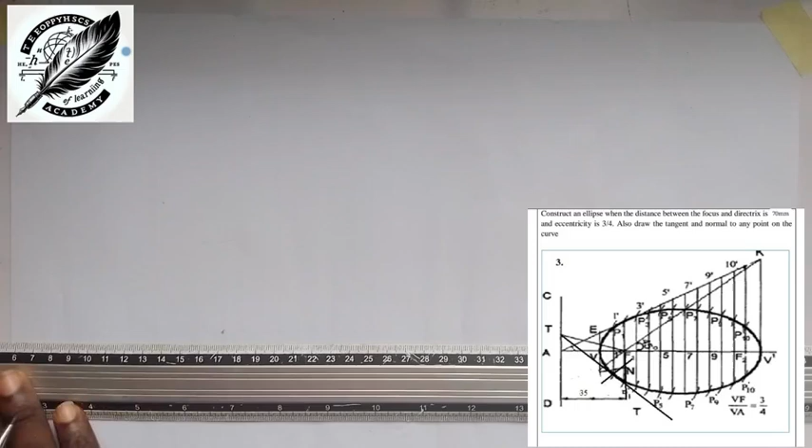I want to talk about how to draw an ellipse given a directrix and the eccentricity.

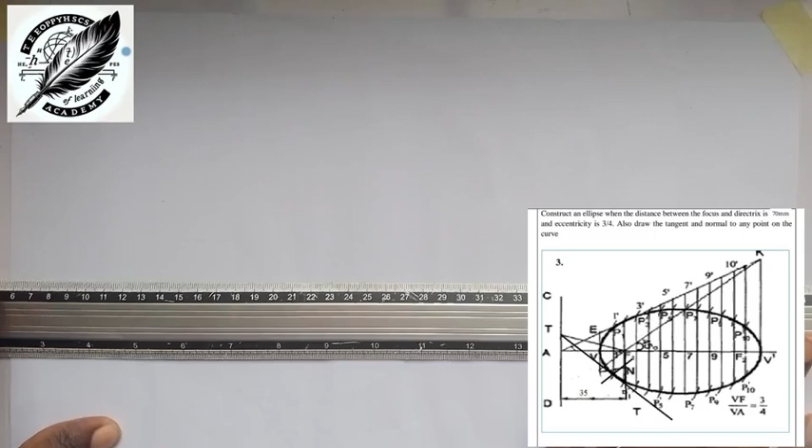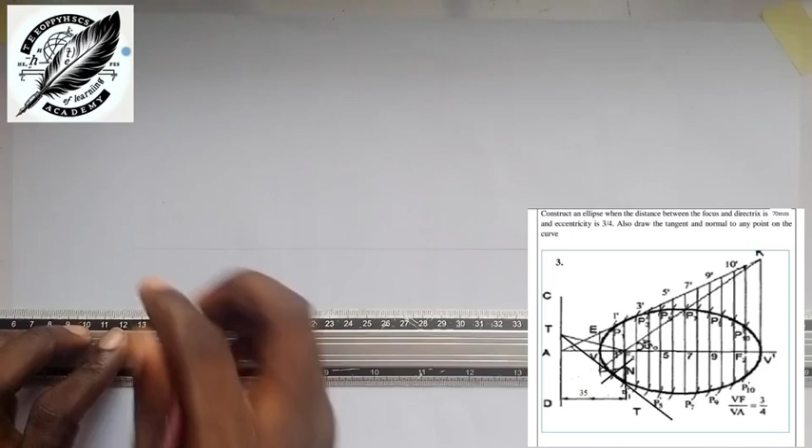So the first thing you need to do is take your ruler, your T-square here, and draw an axis line. So you draw an axis line horizontally here. You label this point here point C, and this here you label C prime. Then you place your set square on your T-square here and draw a vertical line.

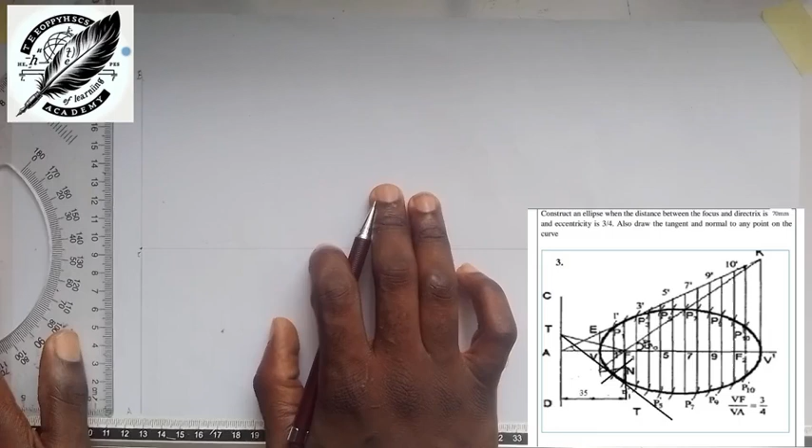So this line is called the directrix line. So you label this as A and this one B. Oh, sorry. Now you can see from the given question that the directrix is 70 mm, and the eccentricity is 3/4. Because my directrix is 70 mm, I can give it as 7 centimeters.

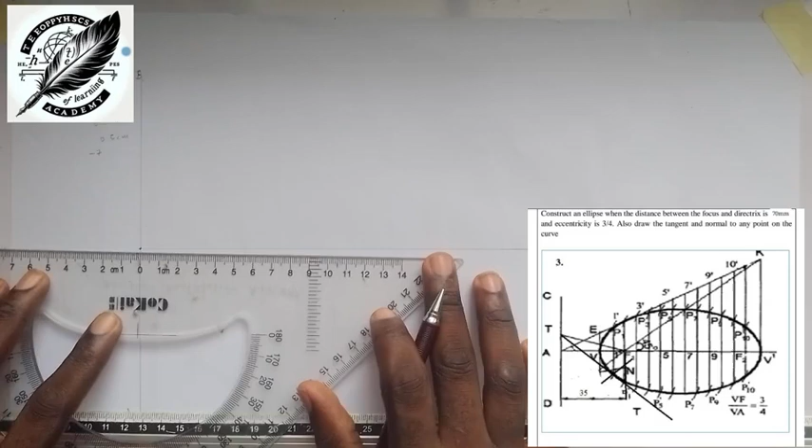Because 7 centimeters is too big, since I'm using A3, I'll divide it by 2, so I'll get 3.5 centimeters. So I'll be using 0.5 centimeter to divide it into 7 parts. Do you get me? So first I will take my ruler here and measure 3.5. So this is 3.5 here. Can you see it? So I'll mark and divide it into 7 parts: 1, 2, 3, 4, 5, 6, 7. Can you see it here?

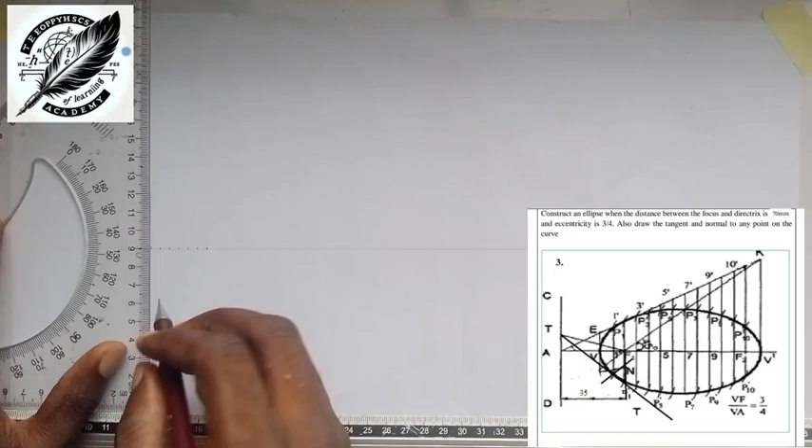So after that I will draw a line, a construction line, to divide it. Can you see? So this point that I measured from here to here is 7, because I used 3.5. I will call it the focal point.

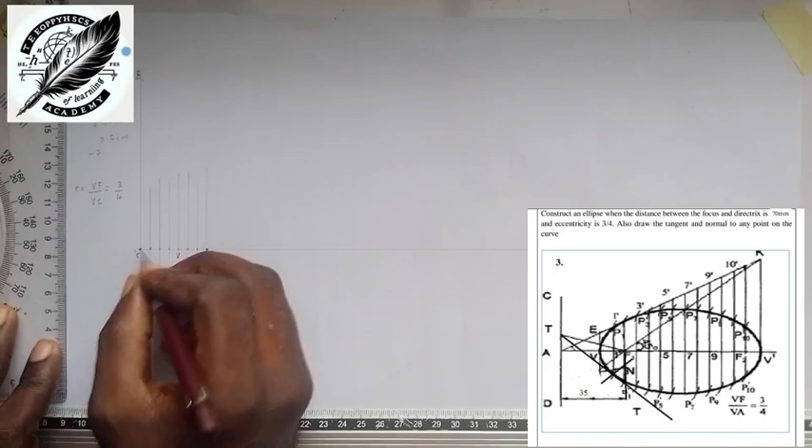Why? You can see that E is equal to VF over VC, which is 3/4. So from V to F is 3, so I need to count 3 lines. I can start counting: 0, 1, 2, 3. So this is V. From V to C is 4. I'll start counting: 0, 1, 2, 3, 4. That is 4. So when I'm done here, I will come to this point.

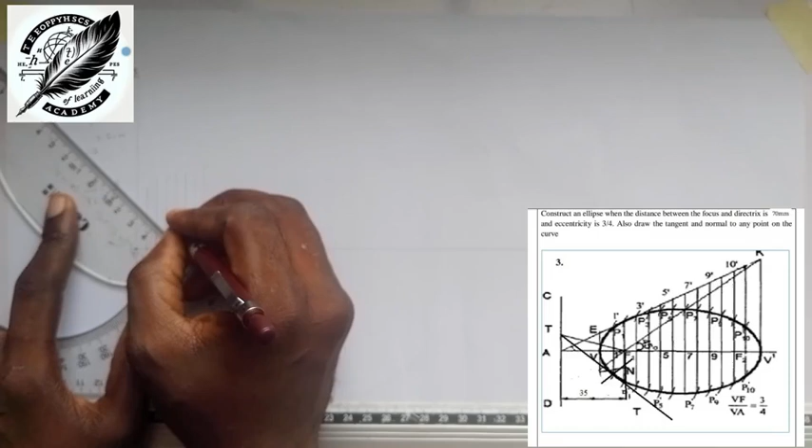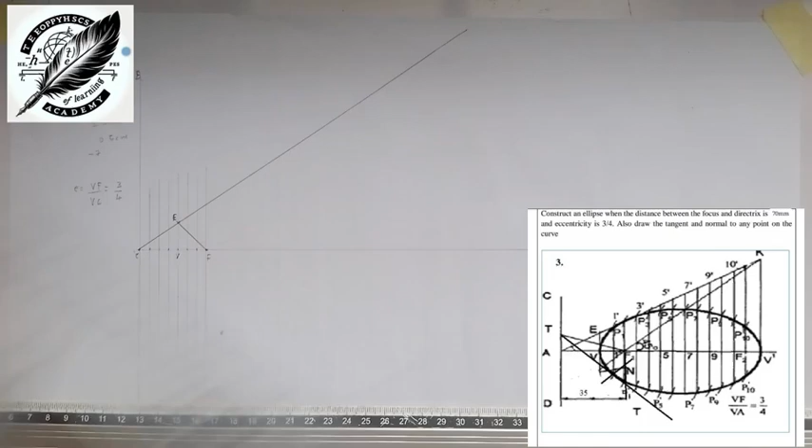I will take the 45-degree set square and connect from F up to V. So I will mark this point here and call it point E. When I'm done, I will take my ruler and connect point E and point C together. Can you see it? Are you seeing?

Now the next thing, I want to know the end. So for me to know the end, I will take my 45-degree set square here and connect where F meets the line from E. So I will connect this one here. Can you see it? So this place will be E prime. So I will drop this one down here, which I will call V prime. Can you see it?

Now I want to get my midpoint. So for me to get my midpoint, I need to start from V, the original V, and V prime, and take my measurement from that point. So this is my V prime, and from this place to this place is 9.5. So when I've got 9.5, what will I do? 9.5 divided by 2, which is 4.75.

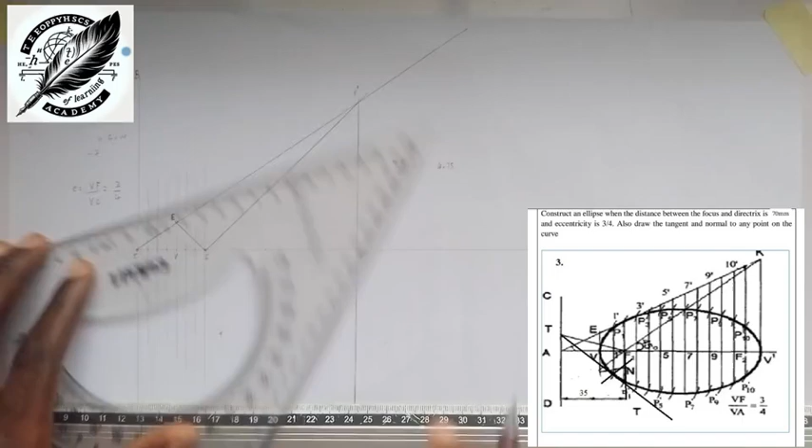So I will come to this place. This is my 0, this is my 4, and this is 4.7, so it will be 4.75 here. So come to this place here and draw a line like this. This is the midpoint. So this one I will call O. Do you get me?

So when I'm done with that, the next part for me to do is to divide this line. Let me just divide the line: 1, 2, 3, 4. I will divide the line into 10 parts. I'll use 1 centimeter for dividing the line. So I will count it and put my point here. So I will count this one.

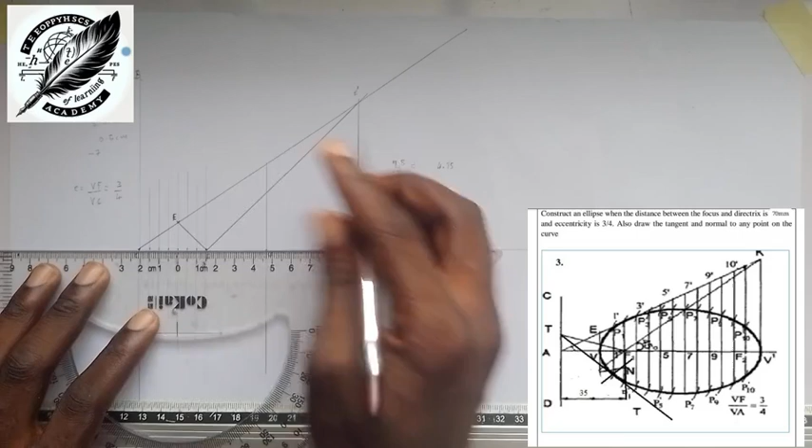Can you see it? So I can start counting. This is 1. I'll call this one 2. Call this one 3. Call this one 4. I'll call this 5, 6, 7, 8, 9. But it doesn't matter.

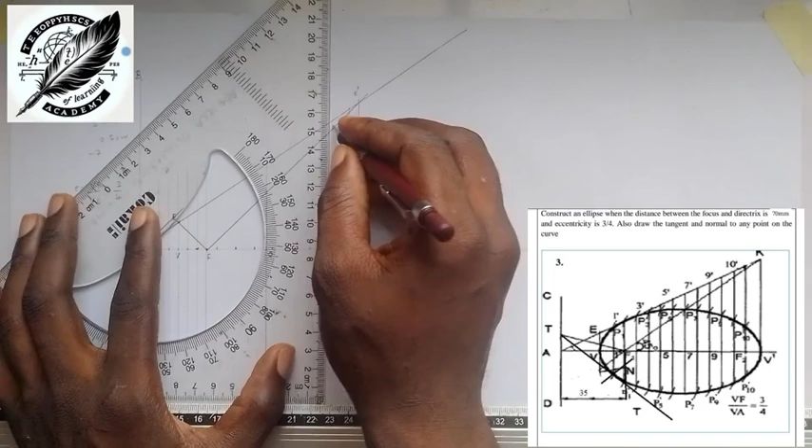Let's just mark this. So I'll just divide this line. Bring this one. Bring it down. Bring this one. Bring it down. Continue like that. Can you see it?

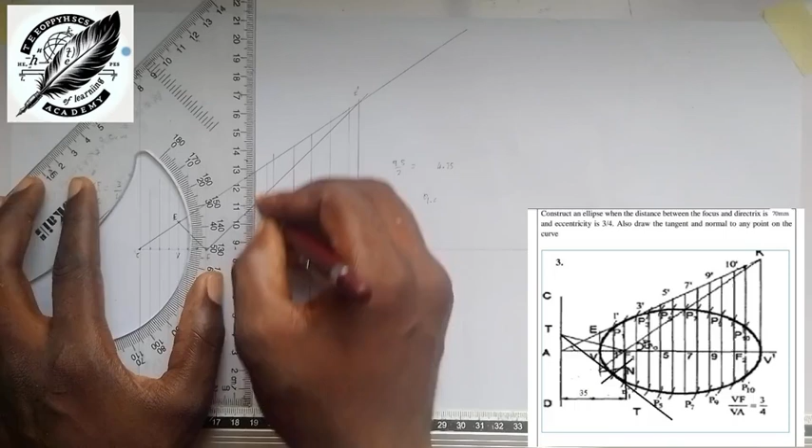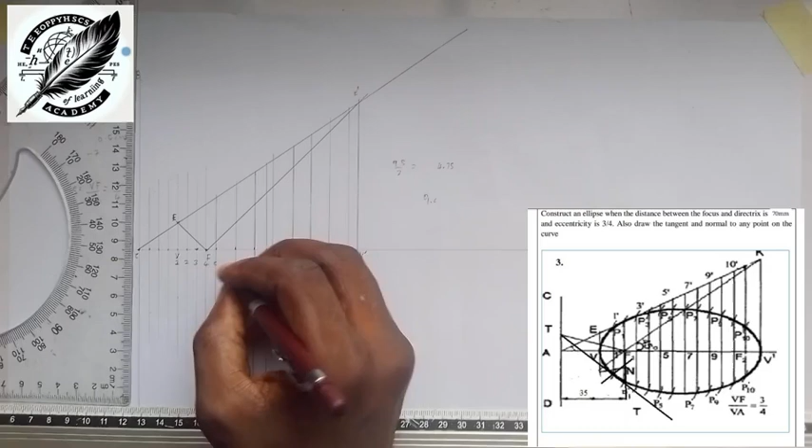So running it, if I can label, let me just label this. I will count this place. I will label this one 1. I will label this one 2, 3, 4, 5, 6, 7, 8, 9, 10, 11, 12, 13.

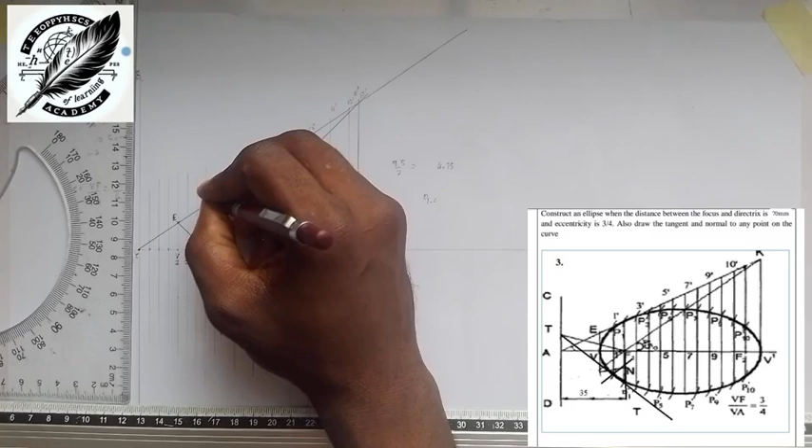I'm doing this one 13 prime, 12 prime, 11 prime, 10 prime, 9 prime, 8 prime, this O prime, 7 prime, 6 prime, 5 prime, 4 prime, 3 prime, 2 prime, 1 prime. So after that, I'll take my compass here.

I'll put my point on 1 and 1 prime here. I will come to my F here, my focal point here. Can you see how this one is marked? I'll put my point on 2 and I'll place my pencil on 2 prime here. Can you see it here? Take it on F here, mark up here where this line meets, and mark this one on 2 down.

So I'll take my point on 3 and place my pencil on 3 prime. So come to this place, I'll mark this place, and I'll mark this place. The next part, I will take my pencil on 4 and pick this up to the 4 point here and mark this down here. Let's see it. Take my compass on 5 and place my pencil on 5 prime. Can you see it here? Take it back to F and mark this space. I will mark this space.

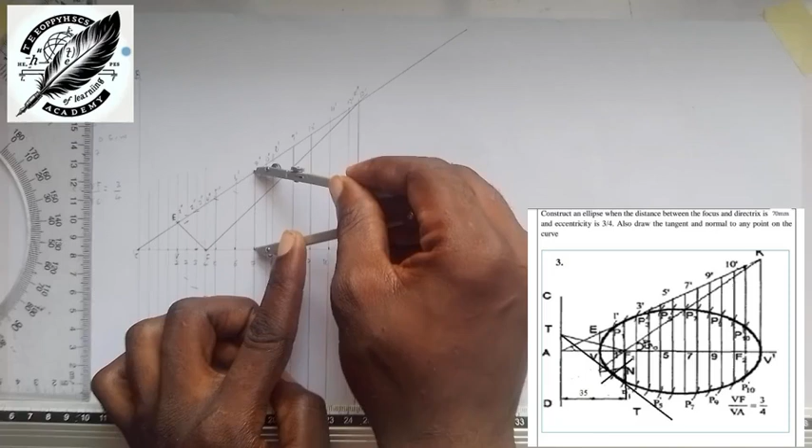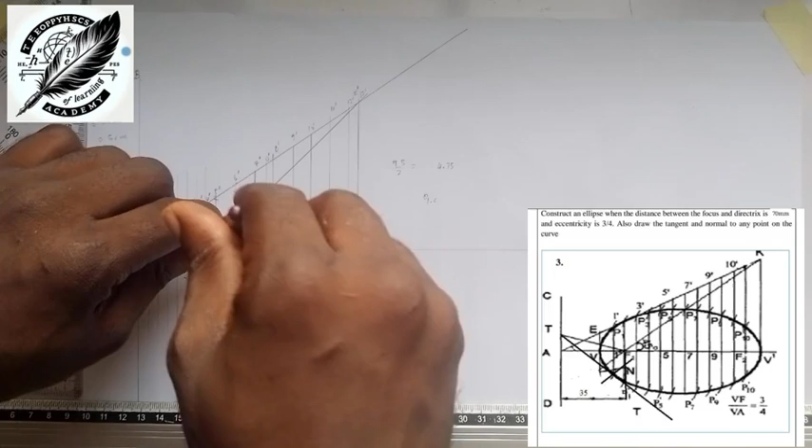So I'll take my compass on 6 here. I will extend to what? 6 prime point. So come back to F here. Mark this space. I will mark this space. Can you see? Take my compass on 7. I will extend it to this space. I will come back to F here. I will mark this space, and then I will mark this space. I will take my compass on 8, extend it to 8 prime. Can you see it? Come back to this space. Mark this space. Mark this space. Can you see it?

Then I will take my compass on 9. I will extend it to this point. Can you see? Come to this space. Come past this space. Connect this one. I will take my compass on 10. I will extend to 10 prime. I will place on F here. I will mark this space. I will mark this space. I will take my compass on 11. I will place on 11 prime here. I will put it here. I will mark this space. Yeah, and I will mark this space.

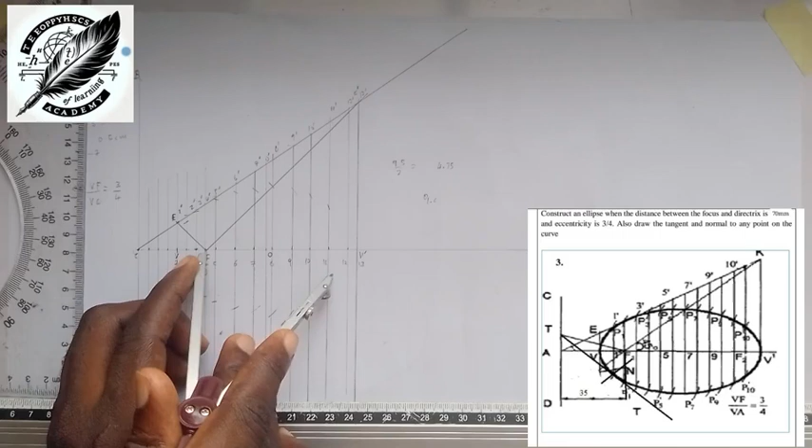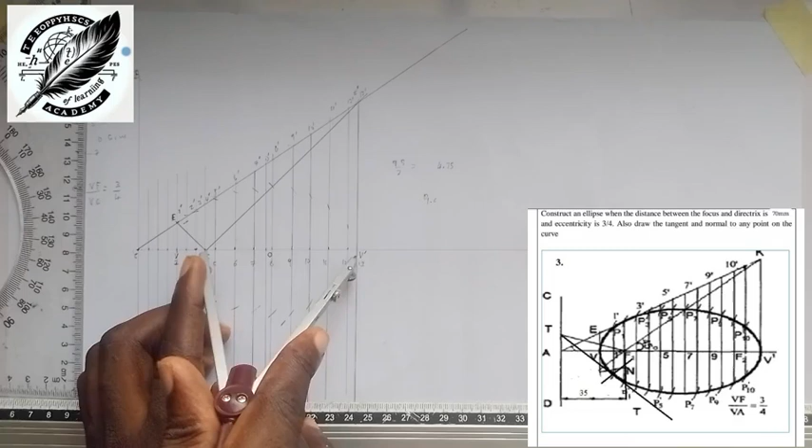So I will take my compass on 12 and I will place on 12 prime. I will mark this space. Can you see? I will mark this space. So the next one, I will take it on 13 prime here. I'll put it here. Can you see it? So that is the end of it.

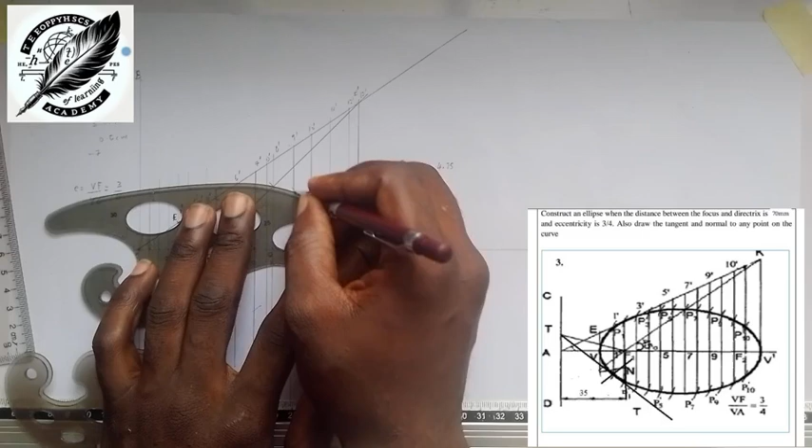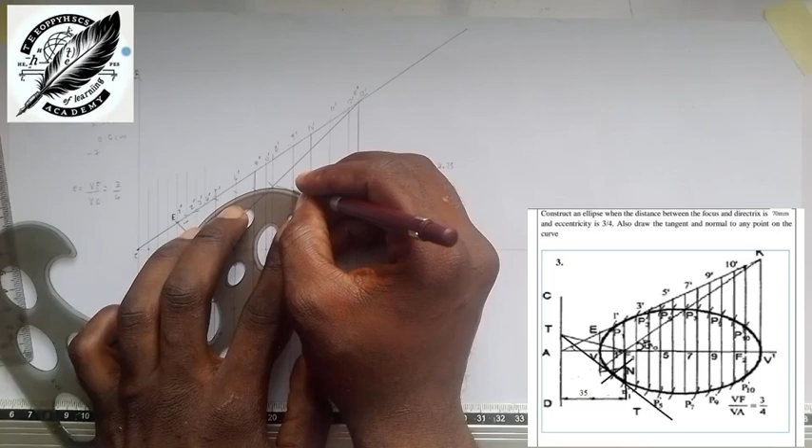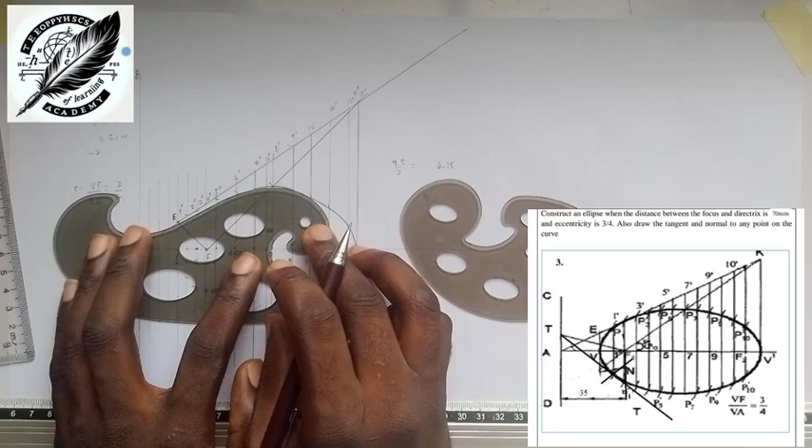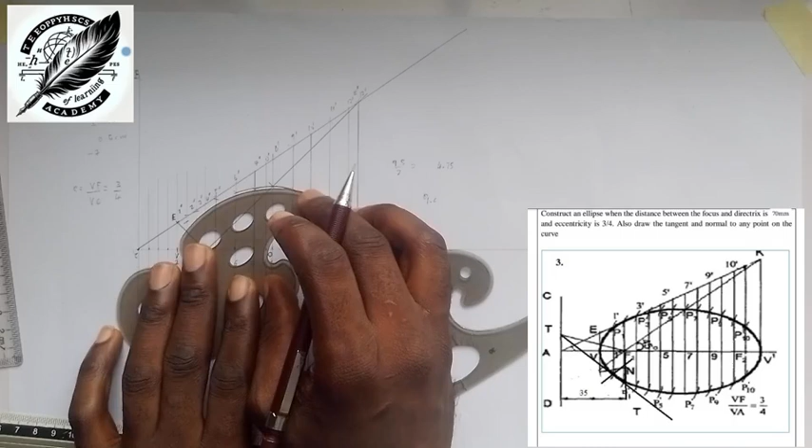So after that, you now take your French curve. Take your French curve and place it on this point and draw to project these arcing lines. So can you see it here? Can you see? So continue like that. So see? Can you see it there? Can you see? So I think so. Come to the side.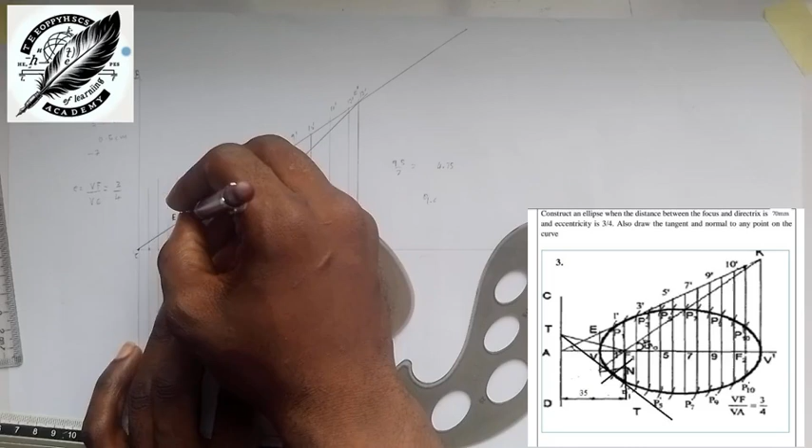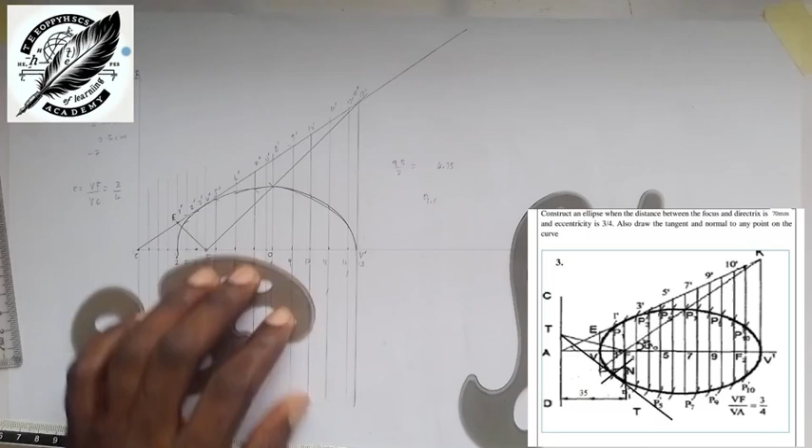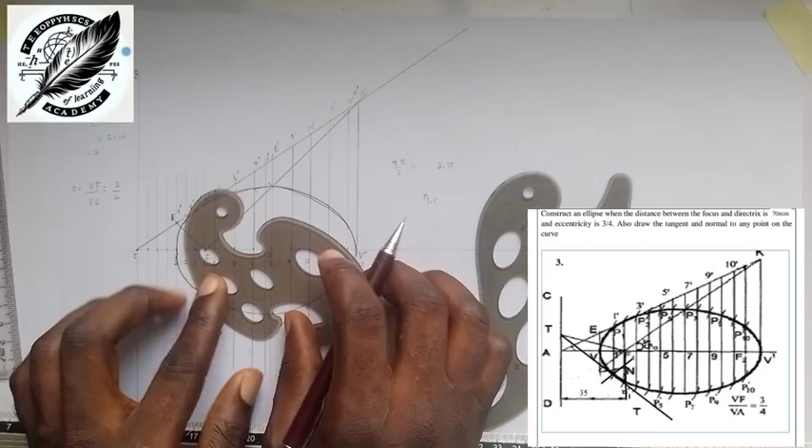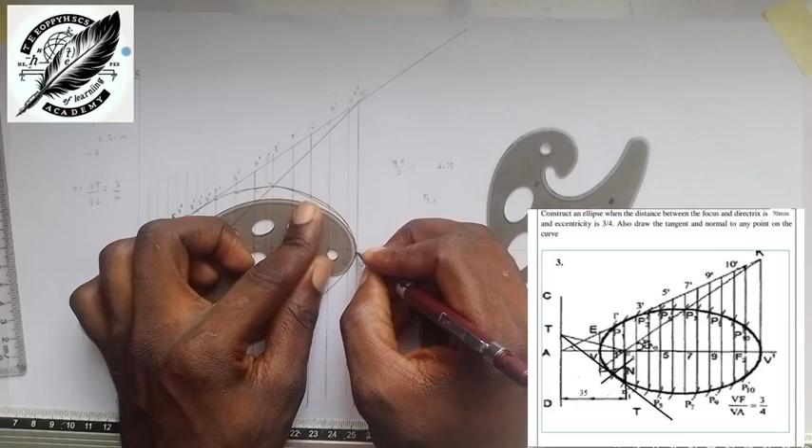So I was saying that I wanted to blend this side enough. It's not blended well. I want to blend it very well. I see. So I'll come to this place. I want to blend this side. So come to this side. Can you see it? I'll come here, side. So have you seen it? Let me just blend it very well. Sorry. I need to blend this face very well, like on the side. So that's how to do it.

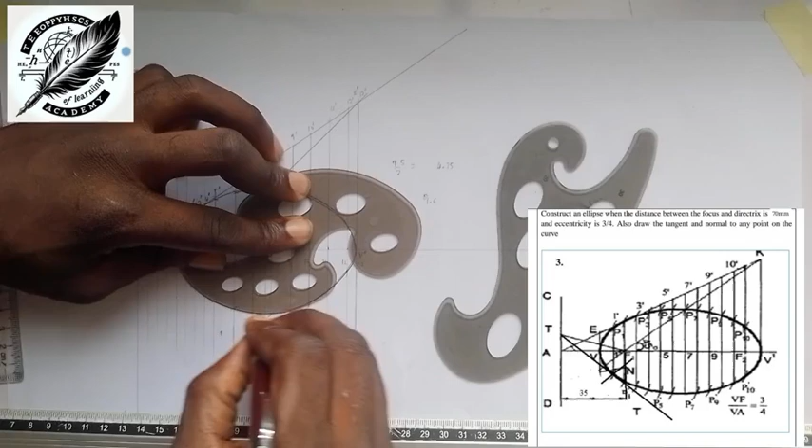So can you see it? So this is an ellipse.